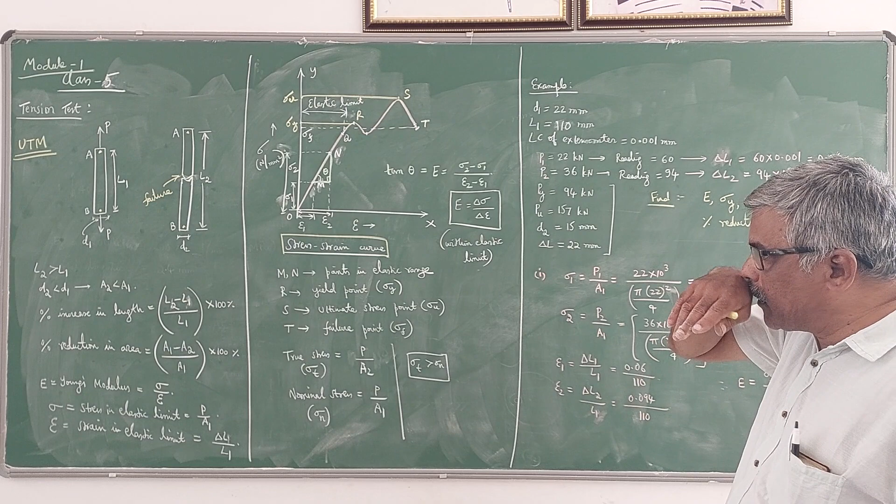So Young's modulus, as we already know, within elastic limits, is the ratio of direct stress to direct strain, sigma divided by epsilon. Here sigma is the stress within the elastic limit, given by resistance force developed divided by the cross section area, P by A, and epsilon is the strain within elastic limits, given by change in length divided by initial length.

Initial length I have taken as L1 here, A1 as the initial area, and A2 as the final area. So A1 is given by pi D1 squared by 4, and A2 is given by pi D2 squared by 4. Those are the formulas since it's a circular specimen.

Now once the load is applied gradually, there will be an instrument called extensometer or dial gauge, by the use of which we can measure the elongation. The extensometer will have some least count, just like your slide calipers and screw gauge. Least count means it is the minimum dimension that can be measured using that particular instrument. Normally the extensometer will be having... I have taken a problem here, I can explain that later.

Using that extensometer or dial gauge, we can measure the increase in length, and in the UTM there is a load indicator. So you have to note down two things: the load you are going to apply, starting from 0, in terms of newtons and then kilonewtons. Till the failure of the specimen occurs, you have to slowly and gradually apply the load.

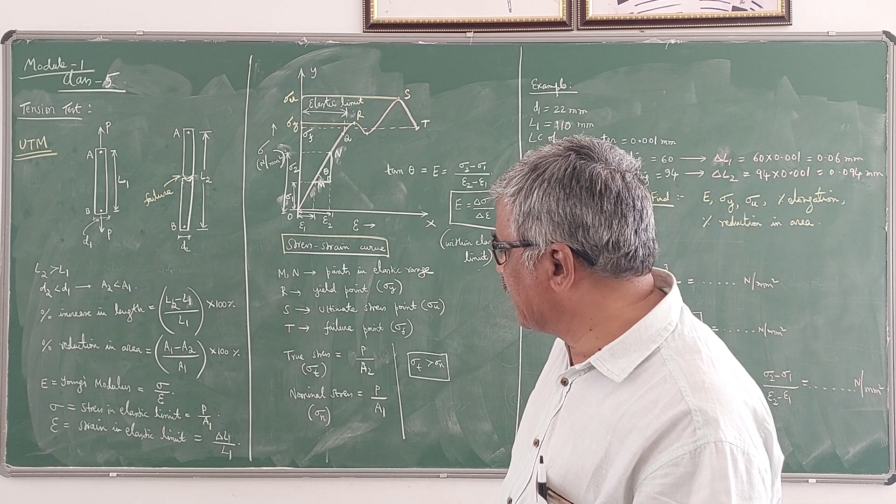You can tabulate the stress values for a particular load value. Then you can calculate the strain value by knowing the extensometer reading, the change or increase in length delta L divided by the original length L1 gives the strain value. So you can tabulate stress and strain values, corresponding values, for a particular value of P.

Here L1 is constant, D1 is constant, L2 is constant, D2 is constant, and P is variable. So at different values of P, you have to find out the stress values and the strain values.

If you plot a graph, stress value you take along the y-axis, strain value epsilon you take along the x-axis. You will get a typical graph like this, a characteristic graph for a mild steel specimen subjected to a tension test.

If you plot the points and join them by a straight line and curves, you get a curve like this. This is a typical theoretical graph. In the experimental part you may not get exactly the same graph, but it will be similar to this.

Initially you can observe that the graph is a straight line. In this portion it is a straight line. Afterwards it takes a curved path. The details of this I have explained in my lecture video, you can see that. So initially it is straight, then it takes a curved shape.

Up to this point it is straight, I have taken here OQ. OQ is the straight line portion, and this Q is called the elastic limit. Up to this point, if you remove the load, the specimen regains its original length and diameter. Afterwards, it enters the plastic state, so the elastic state is over.

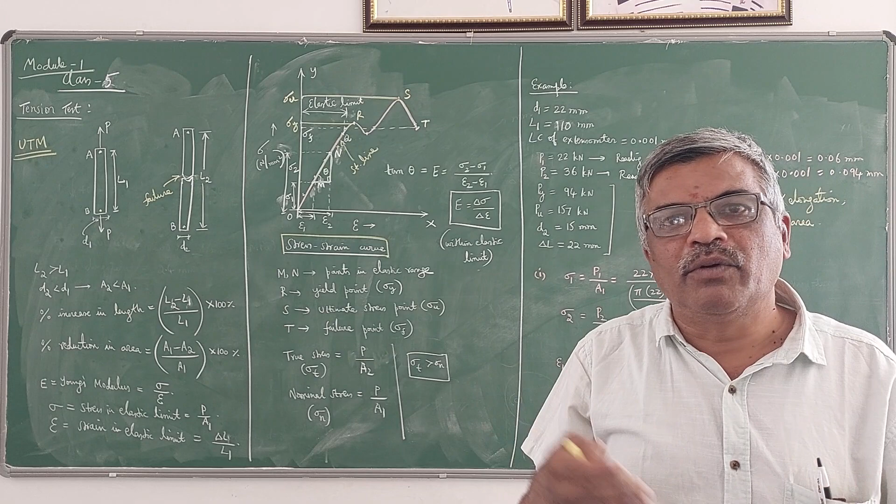Then it starts getting permanent deformation, so even if you remove the load, it won't come back to its original length and diameter, that's all. If you take a point here R, that point is called the yield point. The material starts yielding there, then slightly reduces, then once again increases rapidly.

It takes a maximum load at some point S. This S point is called the ultimate point, or the maximum stress point. Then the stress value reduces, and at last it fails.

So here I have noted down: M and N are the points in the elastic range, two points along the straight line. R is the yield point, with corresponding stress at the yield point written as sigma y, called the yield stress.

Then S is the ultimate stress point, with corresponding stress sigma u, since it is the stress axis. Then T is the failure point, with corresponding stress sigma f. So these stress values you can get from the graph.

Now there are two other things called true stress and nominal stress, sometimes they will ask about these. True stress at a particular load is given by that load divided by the final cross-sectional area, A2, which is pi d2 squared by 4. Nominal stress, sigma n, is the given load divided by the initial cross-sectional area. Since A2 is less than A1, the true stress sigma t will be greater than the nominal stress sigma n.

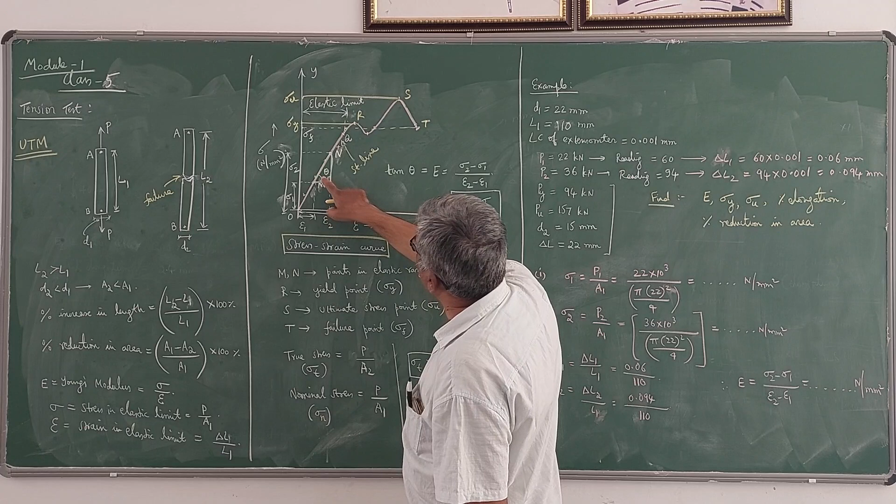If you take the slope of this line, draw a right angle triangle here, if theta is the angle, tan theta gives the slope of this line. What is tan theta here?

I have taken 2 points here, M and N. At point M, the corresponding stress is sigma 1 and the corresponding strain is epsilon 1. At point N, corresponding stress is sigma 2, and corresponding strain is epsilon 2. Now, if you take this triangle, this becomes delta sigma, this becomes delta epsilon.

So if you take tan theta, delta sigma divided by delta epsilon. Delta sigma means difference between these 2 stresses, sigma 2 minus sigma 1, divided by epsilon 2 minus epsilon 1, that gives the value of Young's modulus, because it is nothing but stress divided by strain within elastic limits.

So OQ is the elastic limit, please note. In this region, the straight line portion, you have to consider the slope. Slope of that line itself gives the Young's modulus here.

Now I have taken a problem here. You can just go through this to understand the concept.

In this example, initial diameter of the specimen is 22 mm and initial length, or gauge length, you can call it as gauge length, is 110 mm. This is also called as gauge length.

A and B are called as gauge points here. So gauge length, least count of the extensometer is 0.001 millimeter. That means using that extensometer you can measure a minimum dimension of 0.001 mm.

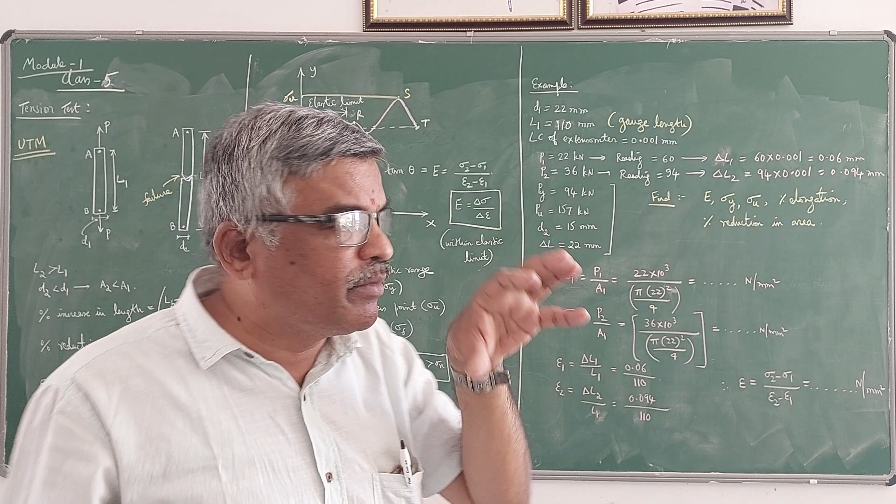Now tension test is conducted on that particular specimen and loads are recorded and extensometer readings are recorded. So here he has given two readings here.

When the load is 22 kilonewton, load acting on the specimen is 22 kilonewton, that is P value is 22 kilonewton, the corresponding extensometer reading is 60. And when the load is 36 kilonewton, extensometer reading is 94.

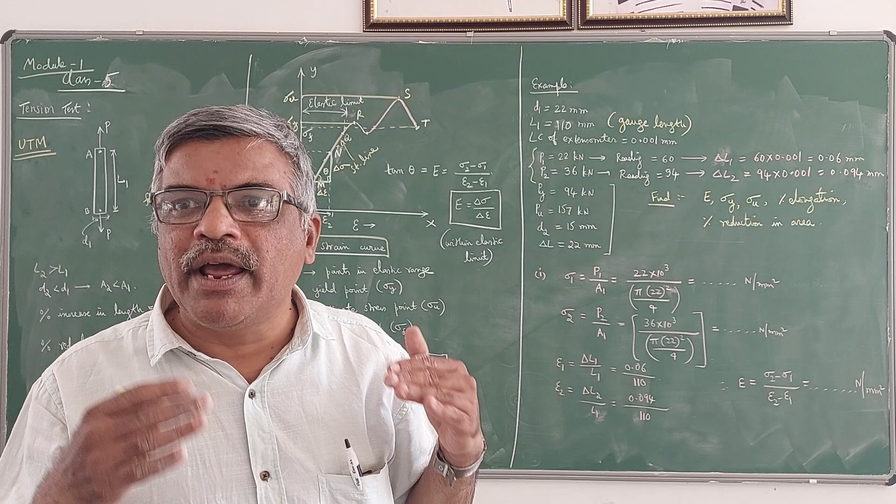If you know the extensometer, by multiplying that reading by the least count of that extensometer, you will get the elongation. So here you can see 60 is the reading. LC, the least count, is 0.001 mm. If you multiply that, you get 0.06 mm. That is the elongation when the load is 22 kilonewton.

When the load increases, the elongation also will increase. It is 94 into 0.001, 0.094 mm. And also he has given the load at yield point.

So to get this point R, when the load is 94 kilonewton, that yield point is observed. When the load is 157 kilonewton, maximum stress is observed, and final diameter of the specimen here at the end of the test, when the specimen fails, your diameter D2 is 15 mm.

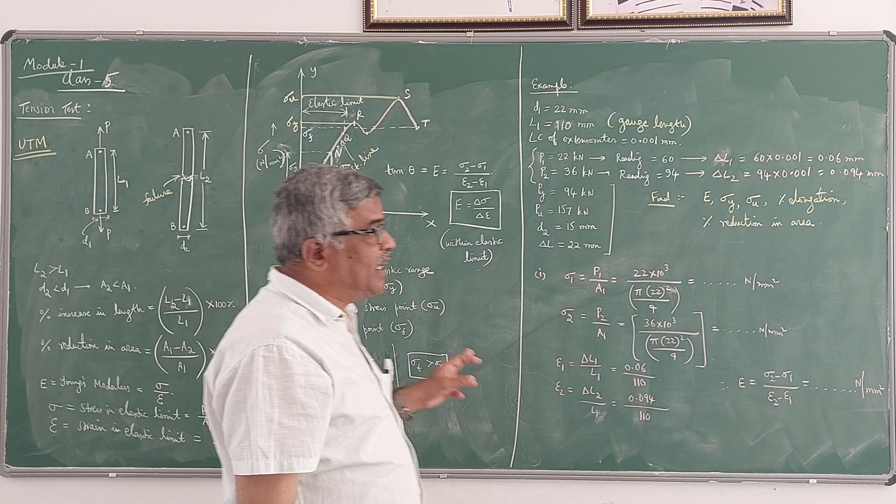So 22 mm has reduced to 15 mm, and length, increase in length is 22 mm. That means initially it was 110 mm gauge length. Now it is increased by 22 mm, so final length L2 is 110 plus 22, 132 mm. So 132 mm is the final length.

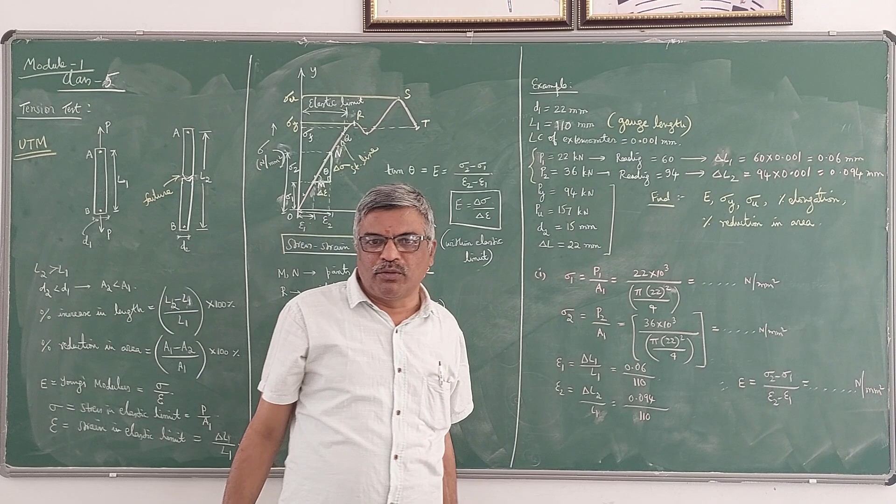So instead of giving final length, he has given the increase in length. So these are the data given.

What he has asked is, you have to find the Young's modulus value of the material of the specimen, yield stress value sigma y, sigma u is ultimate stress value, that is maximum stress value at the point S. There is percentage elongation, percentage reduction in area. So these things he has asked.

This is a typical standard type of problem given for 8 to 10 marks in the examination. So first thing, let us find out E here.

So we know this formula, E is equal to sigma 2 minus sigma 1 by epsilon 2 minus epsilon 1. Here he has given two loads. At these two loads, corresponding stress values you have to find out. So sigma 1 is P1 by A1, where A1 is the initial area.

Initial area only we have to take for calculating stresses, so don't confuse. So, sigma 1 is P1 by A1. P1 is 22 into 10 power 3 Newton, you have to convert to Newton. Divided by A1, which is initial area, pi d1 square by 4, where d1 is 22 mm as given in this problem. Pi into d1 square by 4, you will get some value in Newton per mm square. This is the stress developed in the material when the load is 22 kilonewton.

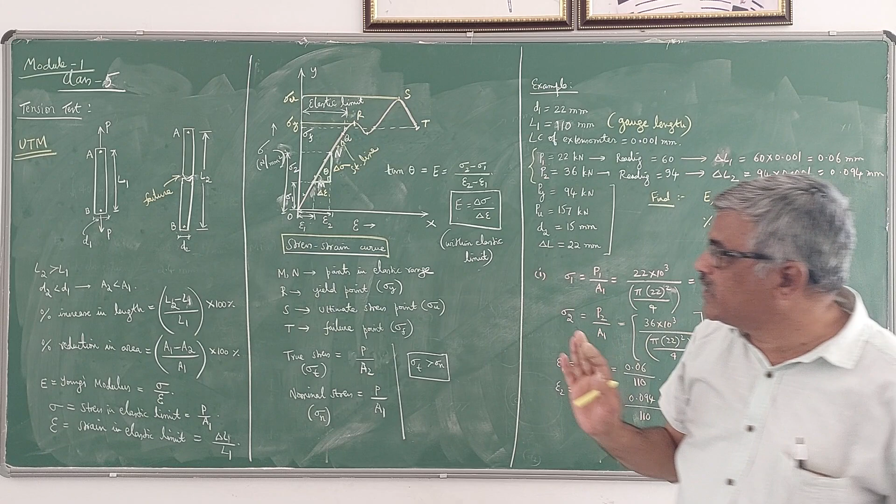When the load is 36 kilonewton, the corresponding stress, you have to divide by the same initial area. Don't take here P2 by A2, it is wrong. A2 here is the final area, but when you are calculating stress within elastic limits, you have to take the initial area only, so it is A1 only. So you are going to get some another value, and this value will be more than the previous one.

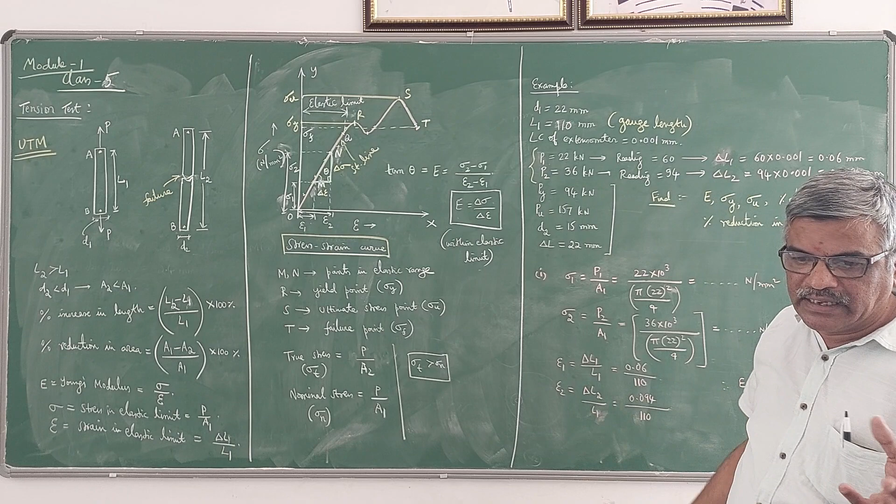And correspondingly the strain values will be calculated. Strain is defined as change in length, or increase in length, divided by original length. So delta L1 is this value, delta L2 is this value we have calculated. So here you substitute that, and you will get like this.

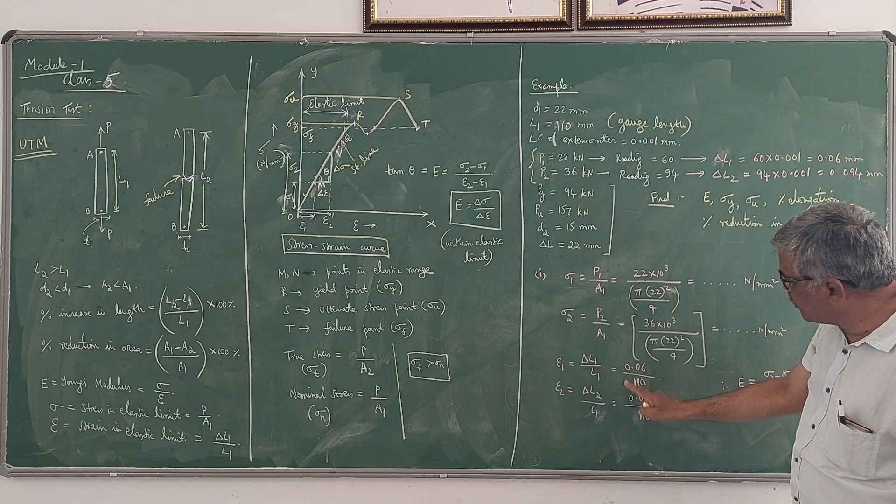Then use this formula: Young's modulus is equal to sigma 2 minus sigma 1 by epsilon 2 minus epsilon 1. So if you substitute, you will get some value here, also in Newton per mm square or MPa, which gives the Young's modulus value.

Now he has asked you to find sigma y. Sigma y is the value of yield stress. Yield stress sigma y is given by Py divided by A1 only, so area we have to take A1 only. Py is given here as 94 kilonewton, so 94 into 10 power 3 divided by area, which is same, pi into 22 square by 4. Simplify this, you will get the Newton per mm square. This is the yield stress value.

Next, he has asked what is sigma u, that is ultimate stress, maximum stress. Sigma u is sigma max, which is given by PU by A1. He has given PU, load at ultimate point, as 157, which is the maximum load that material can take, into 10 power 3, divided by same pi into 22 square by 4. If you simplify this, you get another value in Newton per mm square. That is the ultimate stress.

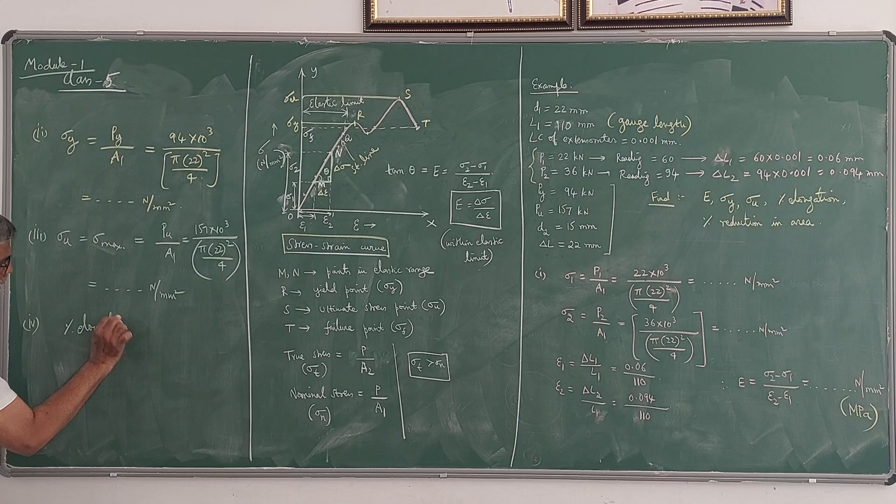Then what else he has asked? Percentage elongation. Percentage elongation, as I already told, is given by percentage increase in length, which is L2 minus L1 divided by L1, or L2 minus L1 is nothing but delta L, divided by L1 into 100, because he has asked for the percentage. So what you get: delta L is 22 mm, 22 divided by L1 which is 110, into 100. So this you will get in percentage.

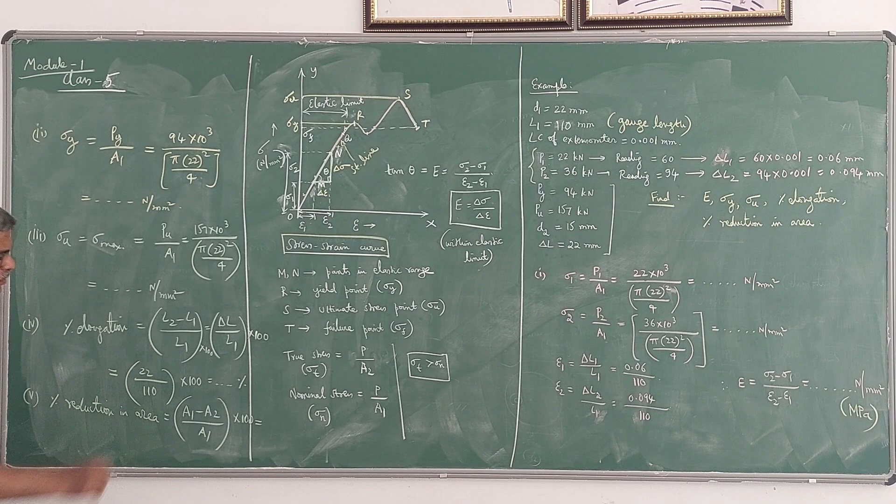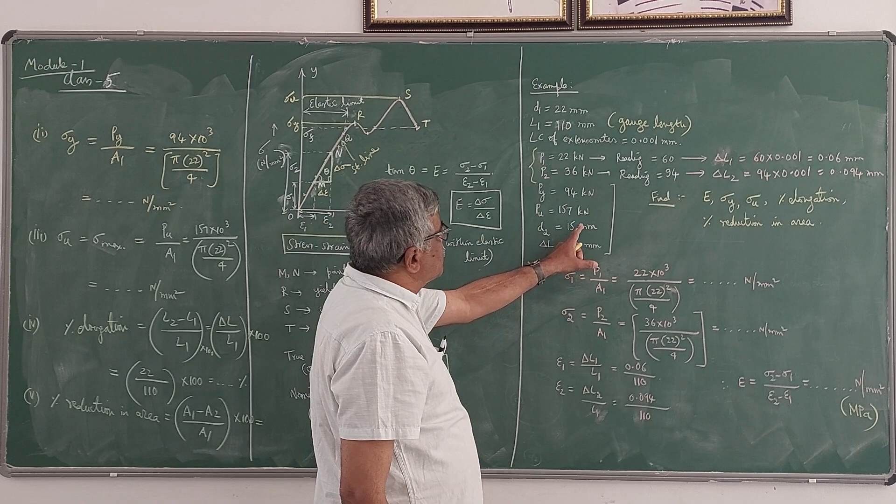Then percentage reduction in area. For this you have to take initial area minus final area, that is A1 minus A2, divided by A1, into 100. So you know both the areas. A1 is nothing but pi into 22 square by 4, minus A2 which is pi into 15 square divided by 4. So here A1 and A2 we can easily find out and then substitute.

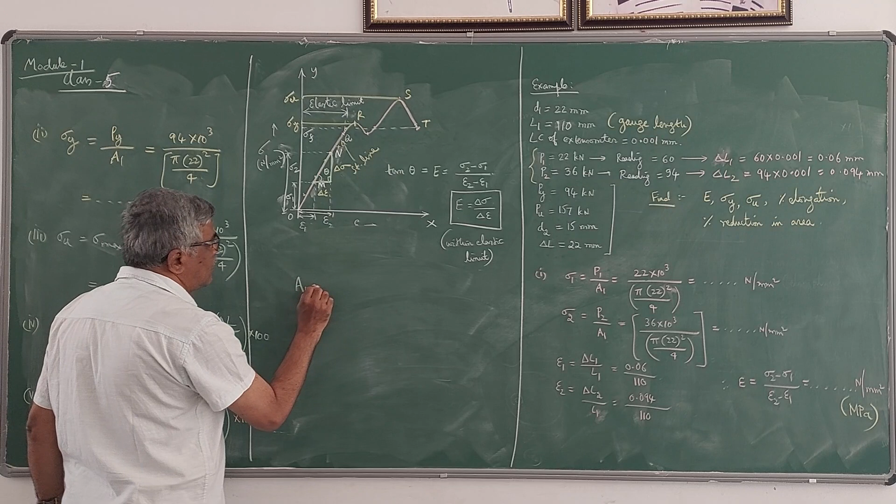So what I will write here is A1 is given by pi by 4 into D1 square, that is pi by 4 into 22 square, so you will get some millimeter square value. A2 is pi by 4 into D2 square, which is pi by 4 into 15 square, the final diameter given, also in millimeter. Once you get these two values, you substitute here and simplify, you will get the percentage reduction in area.

This is a standard type of problem in tension test. Thank you.